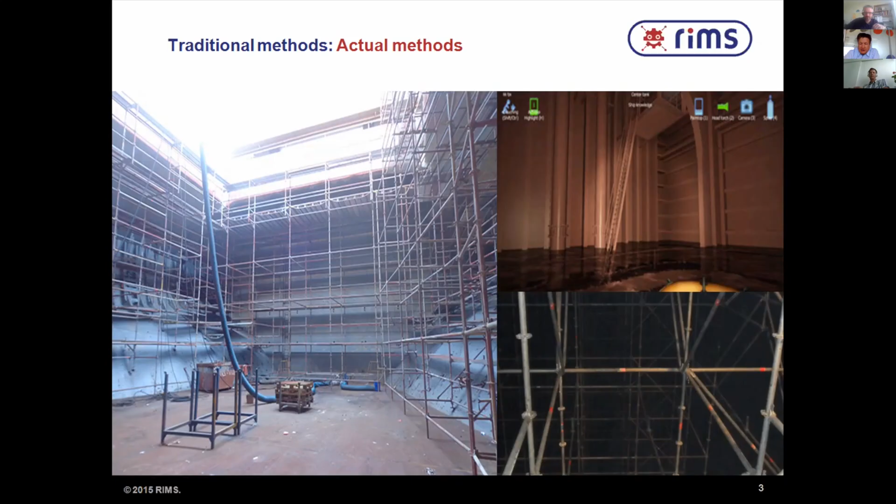These are the traditional methods which are still used. We build a lot of scaffolding and we do the inspections. In some cases, we also do other work, like thickness measurements. But as you can see, in many cases, the whole ship is built with scaffolding - inspections with rafting on the top right, and also scaffolding in the holds. For those managing ships, it's not new, everyone is familiar with that, but it's still happening, and it's a very resource-intensive and expensive methodology, and not always safe.

This is what we do now. We use drones for the inner inspections of holds, cargo holds, ballast tanks, but we also inspect oil rigs from the outside with the drones, which you can see on the left side.

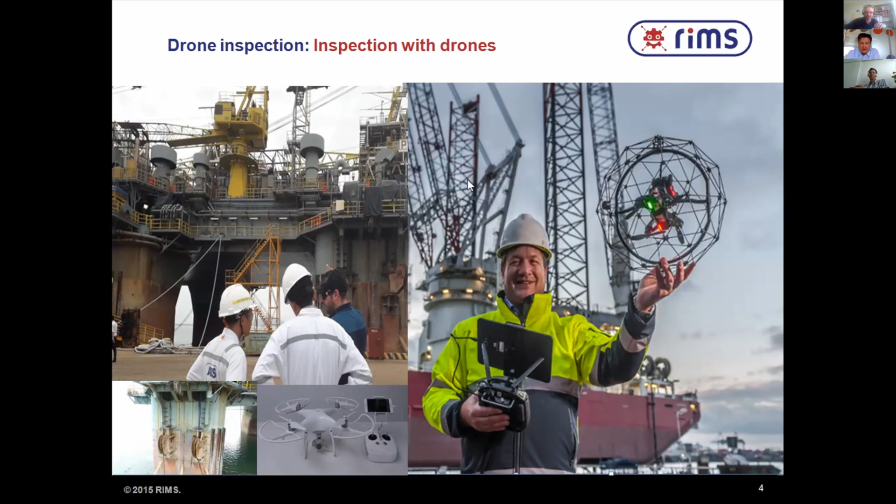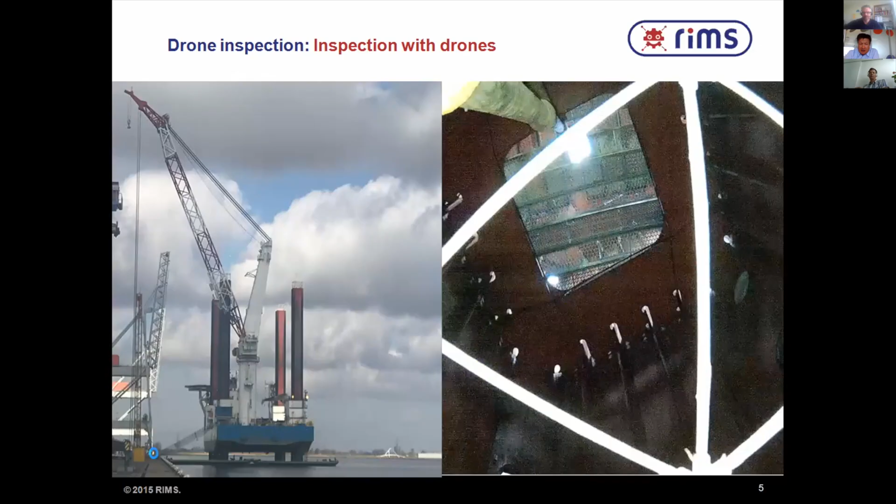We also inspect windmill vessels like the pillars. We've been in a couple of pillars, which is very dangerous and difficult to access. But we do it in a very quick way, and I think we've done a pillar within about an hour, and then we have seen everything and recorded on the drone.

So the pros of drone inspections is, of course, that enclosed space entries are not required anymore. In many cases, we can just open up the manhole and put the drone in. Of course, we have to do some preparations not to get lost in the tank, but this is more covered by a working procedure. We're not working at heights anymore.

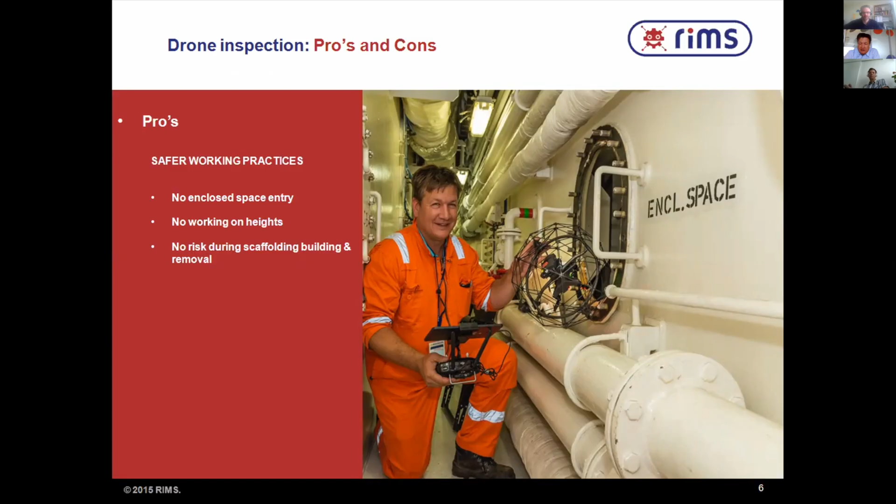We've done inspections of cargo holds of large ore tankers during surveys. Each cargo took us about an hour, without any scaffolding at all. And also, of course, the risk of building the scaffolding is not there anymore. Everyone underestimates that, but building and removing scaffolding takes a certain risk as well.

It's cheaper. This is a rough calculation: it takes a company approximately 21 days to build an entire vessel full with scaffolding, costing 256K, and we can do it in 7 days with 2 pilots and 1 drone.

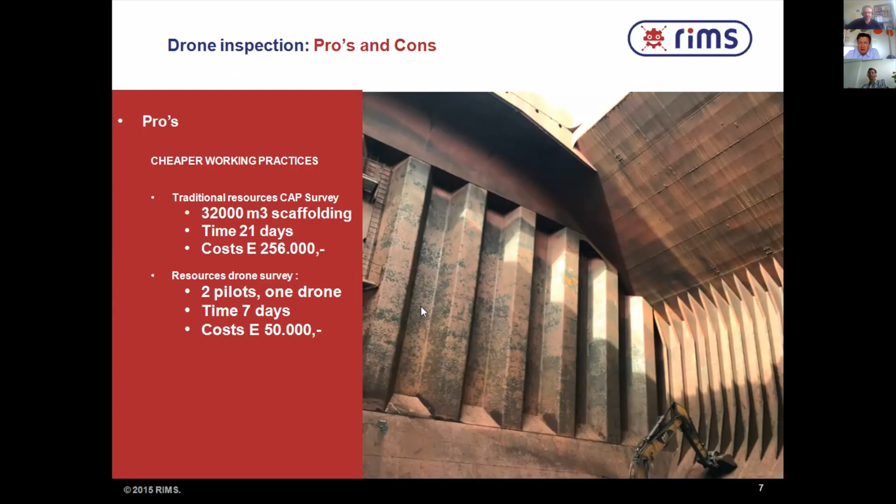This is including the tanks. Last time we did a bulk carrier with only the cargo holds, 9 cargo holds, and it took us about 10 hours to complete the entire inspection of the corrugation, the brackets, and the hatch cover beams during an intermediate survey.

There are some disadvantages because the technology is not there yet. We can't do any NDT measurements. There are drones which actually can do NDT measurements, but it's still on a perfect surface. So the surface needs to be prepared, and especially in tanks and at heights, this is still not possible.

ATEX certification - one company claims there is a drone ready and certified for Zone 2, but this is not the area where we want to fly. We want to fly in Zone 1 and even Zone 0. So old vessels which are in an enhanced survey program are in some cases excluded because the condition of the vessel is so bad that you know there is additional work coming up anyway, so it doesn't make sense to use the drone inside.

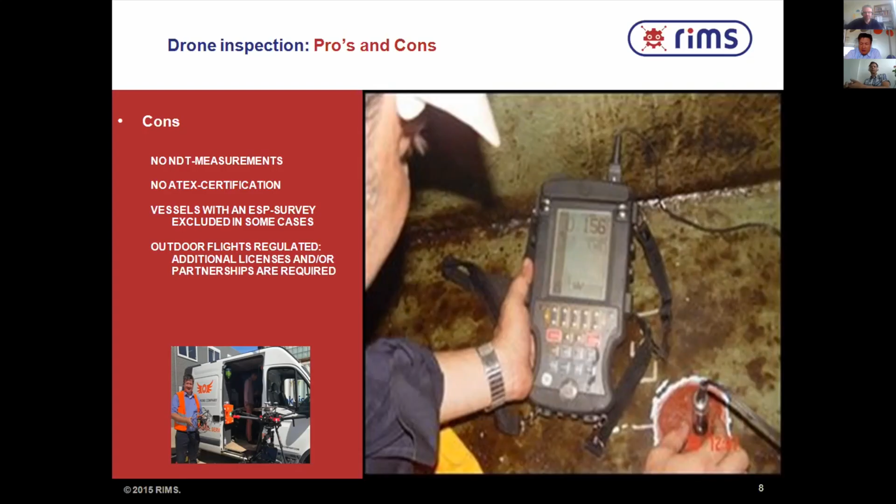For outdoor flights, it's more regulated and you need additional licenses, and therefore partnerships are required, because although you think drone licenses are universal, this is not the case - it depends country by country which license you need. For example, for Holland, we work with a partner. In Singapore, we have a permission to fly in and out, obtaining the operator permit.

These are some reference lists. We did some ballast tanks, jack-up vessels, forepeaks of a tanker, some barges. We have the ballast tank of a self-discharging stone bulk carrier, and the holds of a large ore bulk carrier, which was inspected in 10 hours.

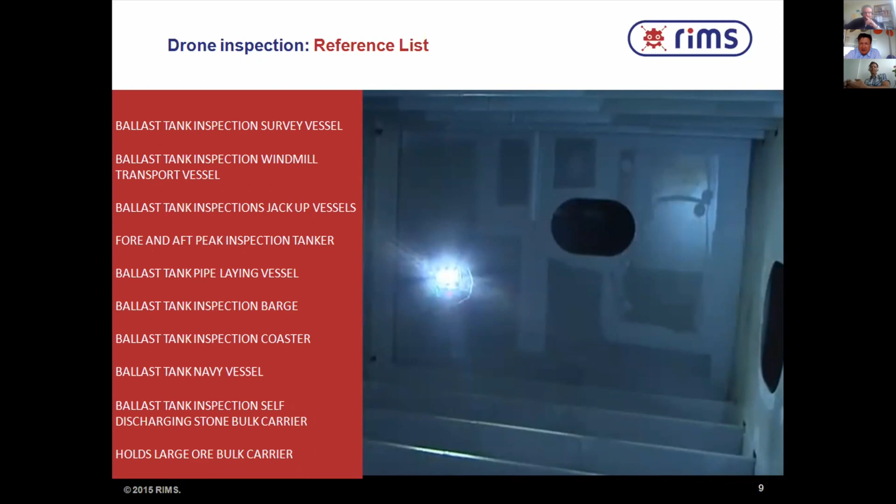We're the first company which has actually all the class approvals. Bureau Veritas was the first, and then we went to DNVGL, ABS, RINA, KRS, Class NK, Lloyds, and IR Class.

We are the only company at this stage which has all the class approvals, which makes us unique. It's definitely required in the maritime industry to become an approved service supplier, similar to a diving survey. We're not a surveyor ourselves, so the surveyor will always join us, but we bring the eyes of the surveyor or inspector to the particular place in the tank or cargo hold.

A little roadmap regarding the new hardware technology. We would like to have the drones fly autonomously, because now the quality also depends on the quality of the pilot. They're hard to find and hard to train. We would like to have a relation between the images and the position of the drone, which is now still in the head of the pilot. We would also like sensor technology to carry out thickness measurements eventually, because that's one of the major things we still need to cover.

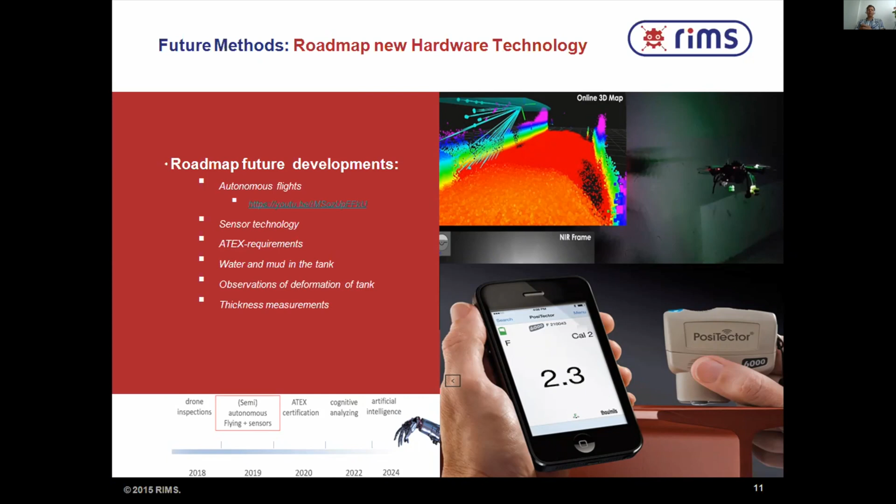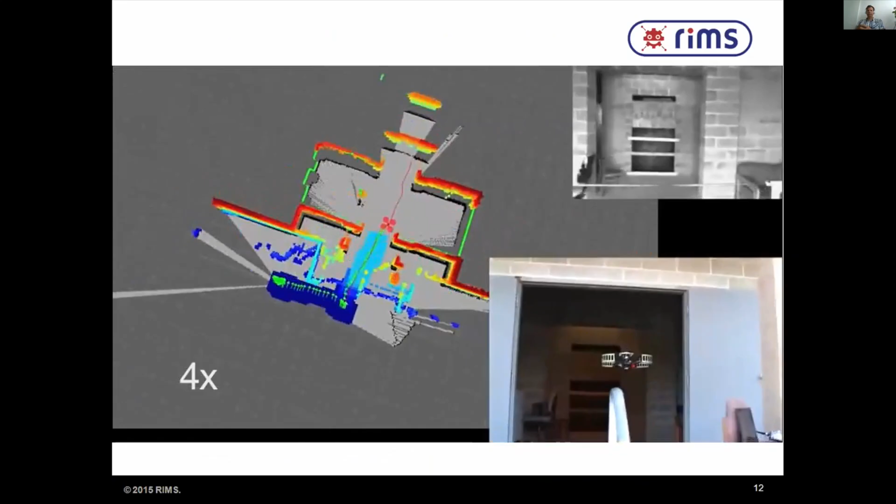Just to give you an example of the autonomous technology and how far the industry already is. On the right, you see the drone in the bottom - there is no pilot involved anymore. On the top you see what the camera is seeing at that cage, and in the colored area, the drone is finding its own path, so there is no pilot involved anymore.

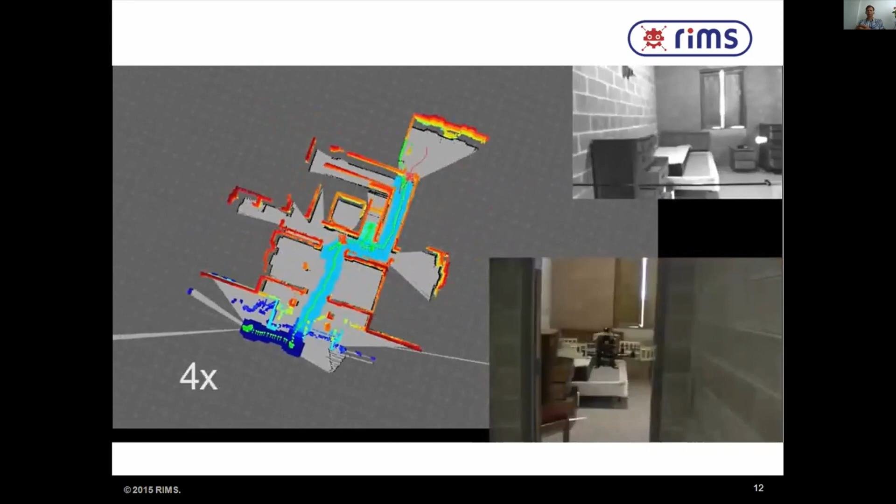In this case, you can also see that there is a relation between the position of the drone and the images and the movie that the drone is making. And the drone just continues flying until it's programmed to come back because the battery is finished, or until it has covered the entire space.

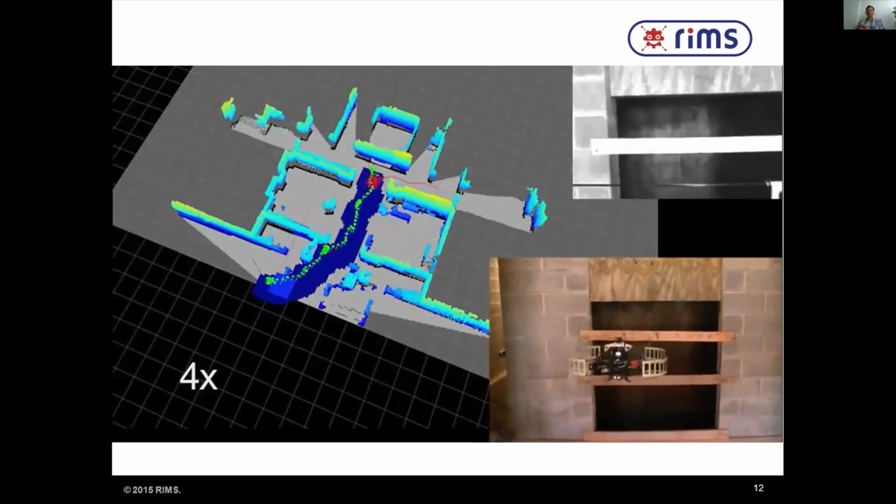Of course, the next step would also be that we go for new software technology, for example data processing and image recognition. The software in itself already exists, we don't have to invent that anymore. The challenge is only that we need to teach the software what is right and wrong, and you still need some skills to do that, and to program the software in such a way that the accuracy goes up very fast. But in general, the technology already exists.

Eventually, no one is going to watch six hours of movie anymore, especially not the surveyor, because he makes a judgment on site. But if ship owners want to have a look at it as well, then we're only interested in what is wrong, not in what is right.

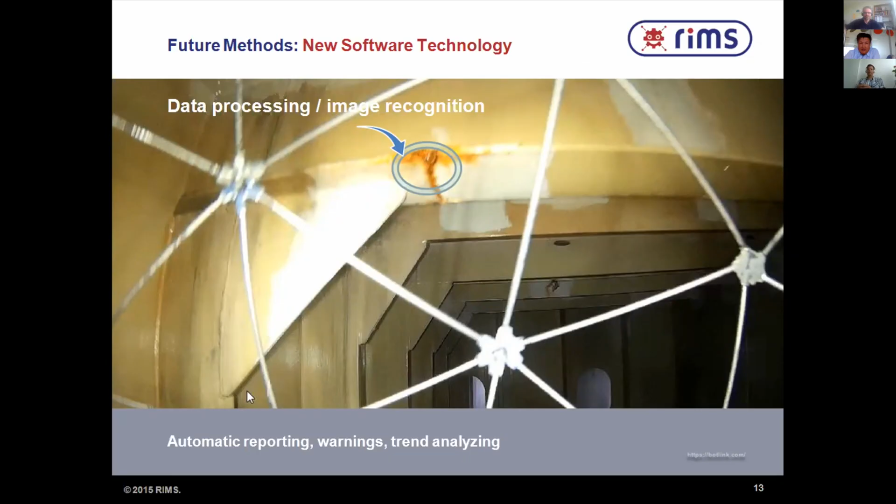Just to wrap up, you can see the traditional methodologies are changing, and there is new technology already available, and future developments never stop. We're very interested in what your view will be on the next roadmap ahead.

Thanks a lot. Okay Matt, it's up to you again. Thank you very much, extremely interesting. That was fantastic, and it's really a glimpse to see wow, how far we've already come with all these technologies.

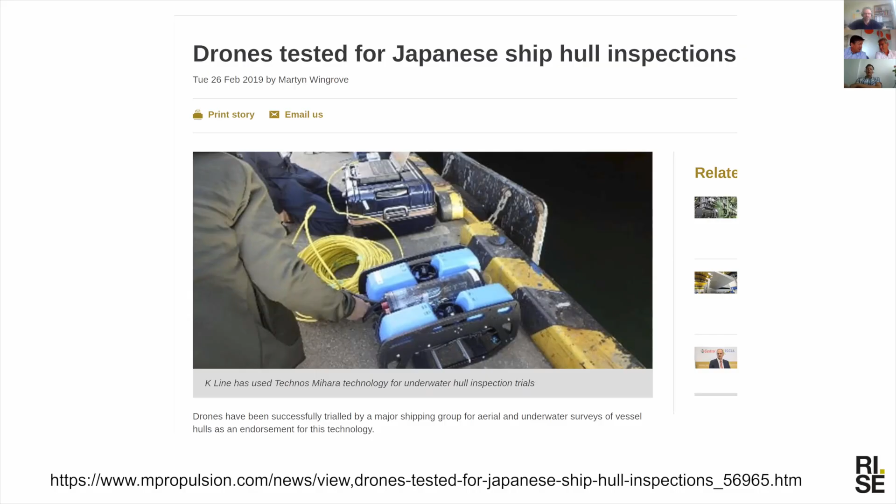Here's Rims—you've been on my radar for a while. I follow your progress, and I take my hat off to you. Congratulations on adding the classification societies one by one, that's fantastic. And I think that's the future, but I think this is one of the key things that need to come into place.

It's the classifications, it's the approval around this—so we have it for drones, and it's even at a high level now: a permission, an organized way to fly these drones. Maybe not as free as every drone operator wants, but at least we have a common work field for this in the European Union, and that is something we lack in other drones, I think.

Still, if we want to go autonomous and out of line of sight, and we are not inside a ship, there are some challenges. Flying without line of sight still needs paperwork, and to achieve the real societal gains, we need to sort that out.

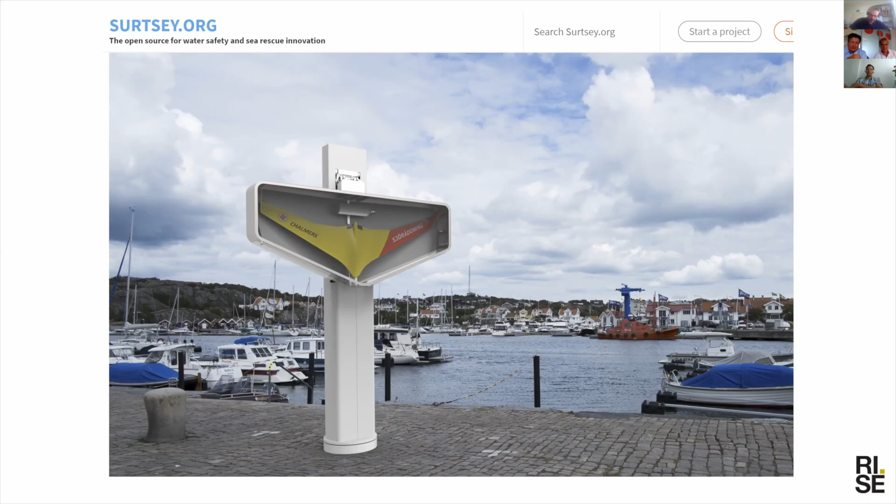This is an example where the Swedish Sea Rescue Society wants to have drones posted in small ports where they have a lot of pleasure craft. They want to be able to launch them remotely and fly them out of line of sight, so they can get an eye on the site extremely fast, while the rescue boat or water jet is steaming towards the incident site, knowing much more about what's going on the water before they arrive.

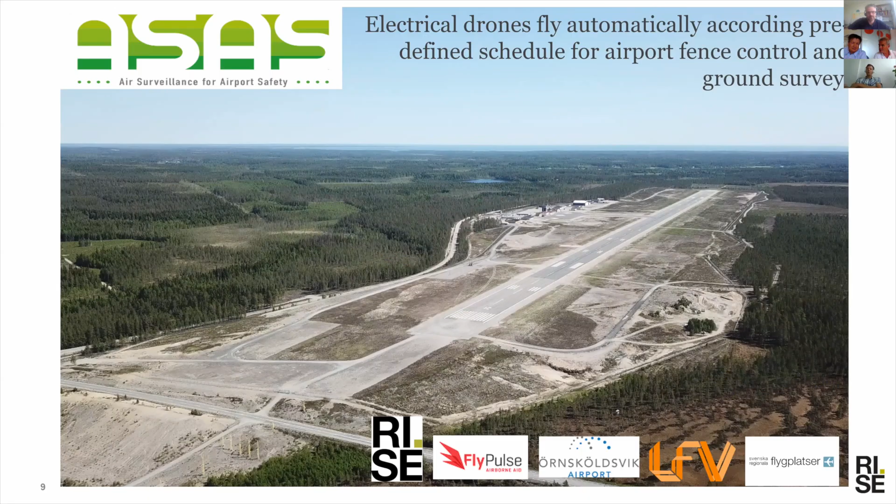Here's another project where we at RISE are involved. It's autonomous—the challenge is to do inspection autonomously on an airfield, checking the runway and the fence, the perimeters. Yes, we do that manually, we fly them, etc. But the challenge is to do it autonomously, and it has to work all year, in all weather, and that's also a challenge.

So, bigger things—this is a fantastic trend. I think this is also a drone to me, even if it's a cargo ship or something like that. It can be unmanned in the future, but for now we will see manned systems for a longer period. Maybe in a short while we will see downsizing of manning. This might handle some more sophisticated work.

Dredging, etc., without personnel on board. We see some experimental harbor tug operations at the moment.

This one is also a drone to me—it will be manned in the beginning. What's interesting here is that the port interface will also be even more highly automated, and we see some terminals already around the world that are automated or almost autonomously operated. So that's also drones for me—the vessel, the crane, the straddle carrier, etc.—all kinds of drones, and this is a whole ecosystem building up around the shipping industry.

In Gothenburg, there's a project where they want to test even hinterland transportation with drones—containers loaded on a lorry, and the lorry goes almost autonomously all the way into Borås, which is almost a 100 kilometer ride, to a terminal in Borås.

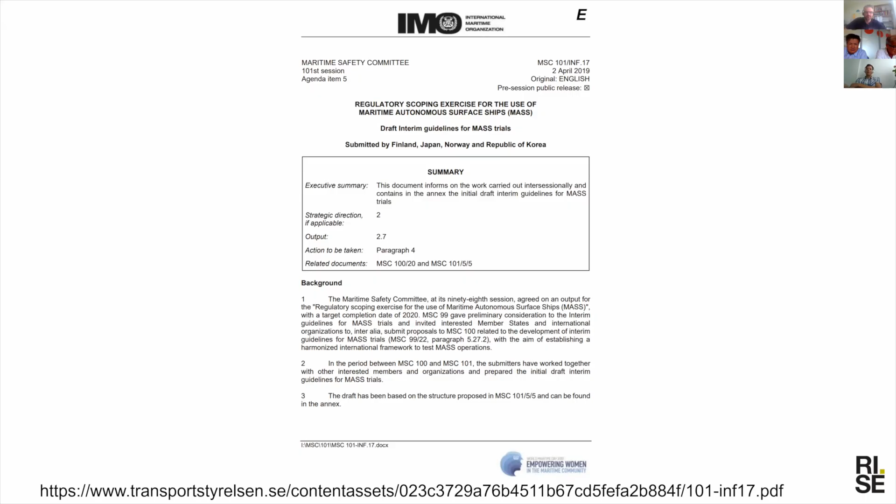The good thing about this is it's the same or very similar technology used across the board, but they have some different challenges, especially for the maritime sector where it has to work all weather, all year, and you can't really stop it. So I think the weather is also a very challenging thing that we need to sort out in the future, but we will do it.

Even the ports, as I said, some terminals are already automated, but this is something we will see in a much wider context. I think it's interesting. There's a big ecosystem around this that comes into place, and it moves really fast. This was not on the agenda 5 years ago. It was not on the agenda maybe 3 years ago, but today it's pushed forward.

And I think there's a lot of things we could do here to compete and increase the efficiency, especially if we're looking towards increasing the efficiency in Europe compared to, for example, China. So automation is something that we really need to do everywhere. And I'm going to stop there. Here's a short list of my references, and I will be looking forward to the discussion a little bit later.

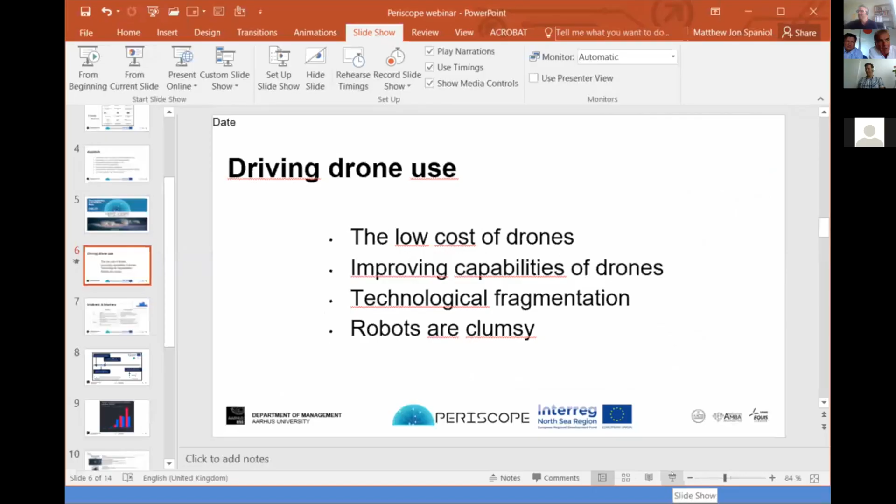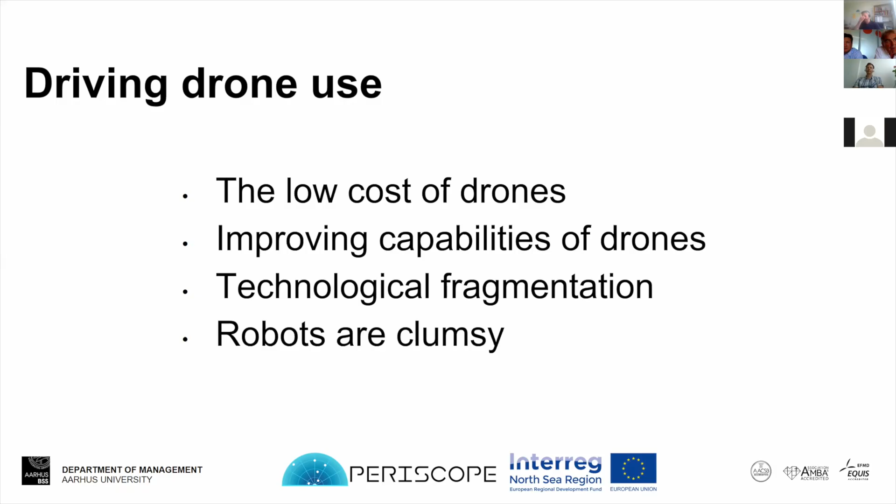Well, telling about the subject, with the group of people working in the Periscope where we are identifying the opportunities, we say, okay, this is something we think about, but what is the market thinking? So the Aarhus University issued a small survey, basically with only a few questions, which allow maritime professionals to give their opinion in just a few minutes. Basically, the questions were, what is your opinion about the market for this particular product, and when do you think this will happen? And we issued the survey, and people also had the possibility to put comments. This is what we got from the people about this technology.

We asked explicitly about the use of drones in enclosed spaces, and if you look at market potential, you see that the technology already exists, and there is an immense growth of the drone industry. So how can you turn the technology of today into the service of the future? Also, one of the disadvantages mentioned was that technology is available, but it is fragmented in the industry, scattered around. So we think, is it possible to make an acceleration by fighting against this fragmentation of knowledge and bringing it all together?

And also an issue is finance. I will come back to this at the end, but finance is a bottleneck. How can you activate investors in this technology so that they really see it as a future business model? Because the business model in the beginning is not so easy, and only when you start to scale up does it get more economical.

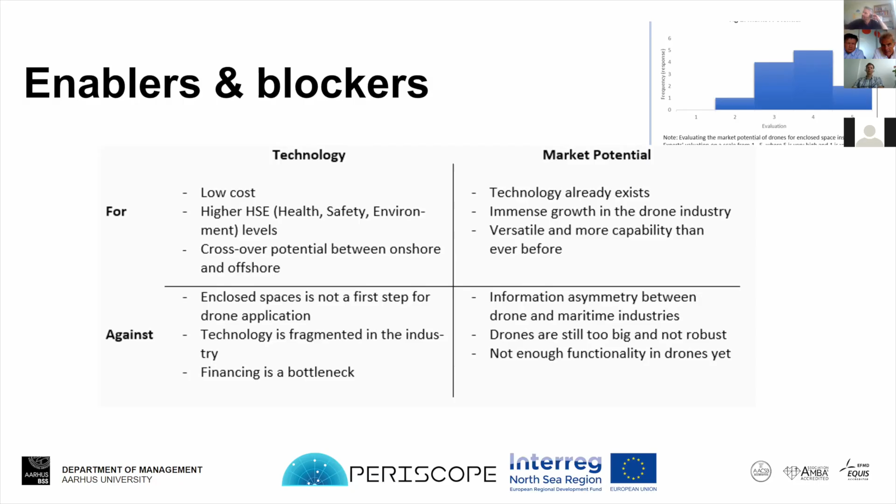Matt, do you also have this in here, the results of the two questions? It says about timing, people, it was between 2020 and 2025, that was the mean. And that means that the maritime professionals filling in the survey really think it's something on the medium term. So it's around the corner, not something which is science fiction or future for 2030. It's really already at the beginning of the next decade.

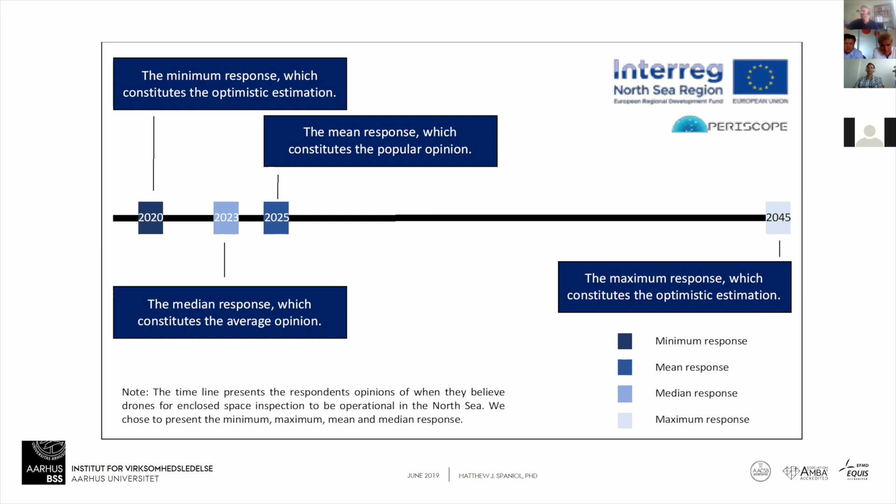And I would add to that, but this one's particularly referencing the drone inspection of enclosed spaces. So each of these surveys is then taking a very focused view on a number of these different topics.